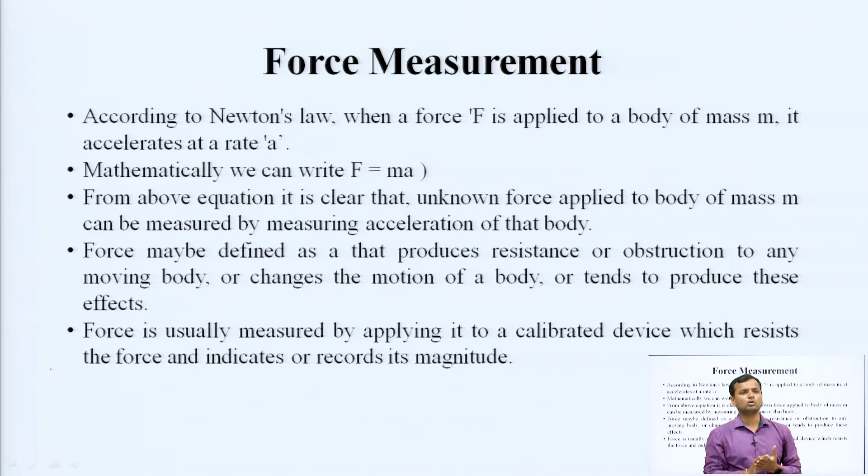So there are basic various devices to measure force, or the pressure, because pressure is also proportional to force. There are various arrangements and various techniques that can be used to measure force.

First is force measurement using accelerometer, second is force measurement using vibrating wire sensor, third is force measurement using the load cell. In that we have two categories: first is cantilever beam type load cell, and the second is column type load cell.

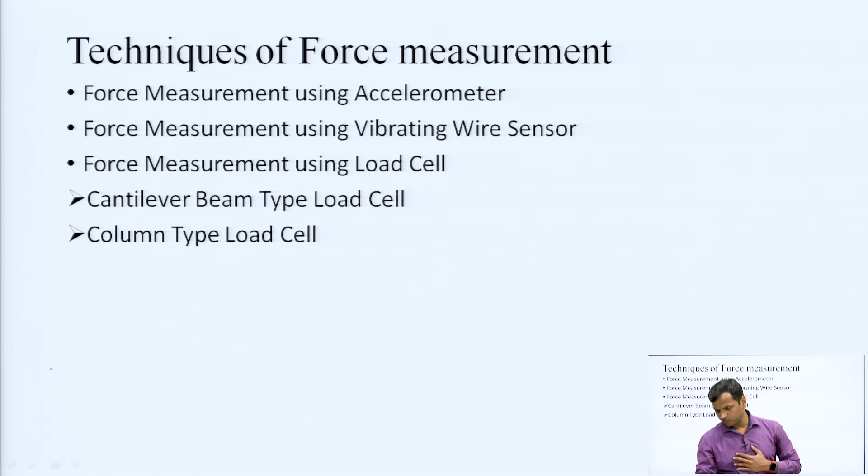So first is force measurement using accelerometer. This is the basic arrangement of force measurement using accelerometer. By using an accelerometer of any type, the acceleration of a body of known mass due to applied force can be measured, as we have seen in the formula F is equal to ma. It will be proportional to the mass of the body and the acceleration. So by knowing the amount of acceleration in the body of mass m, we can know the force.

By using accelerometer of any type, the acceleration of a body of known mass due to applied force can be measured. Then using Newton's law, from mass and acceleration, the applied unknown force can be calculated. But practically when we use the accelerometer for force measurement, it is limited because forces are not free, but they are part of the system, so it is very difficult to decouple these forces.

Also, this technique is useful in measuring some transient forces, because acceleration provides motion in the body, so it will also give the transient forces of motion, since force is proportional to mass and acceleration as well. The application of this technique is in calibration of forces produced by thrust motors or in space vehicles. This is the basic application when using the accelerometer method of force measurement.

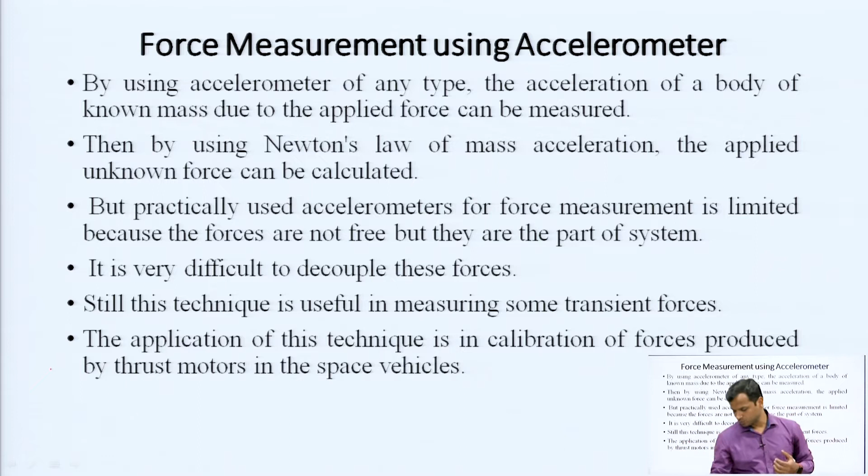Now the second technique. The previous technique was very basic and simple, because in the formula of force, F is equal to ma, it is proportional to mass as well as acceleration, so by providing acceleration in any body of mass m, we can know the force. The second method of force measurement is using the vibrating wire sensor.

A wire is kept vibrating at its resonant frequency using a variable frequency oscillator. In that arrangement, one variable frequency oscillator can be used. The resonant frequency given by the variable frequency oscillator is f equals 0.5 by L, under root of T by m. Here f gives the resonant frequency, L is the total length of wire used, m is the mass per unit length of the wire, and T is the tension due to the applied force.

So, the formula for resonant frequency can be given as 0.5 by L under root T by m. That will be the basic formula used for force measurement by a vibrating wire sensor. This is the basic arrangement for force measurement using the vibrating wire sensor.

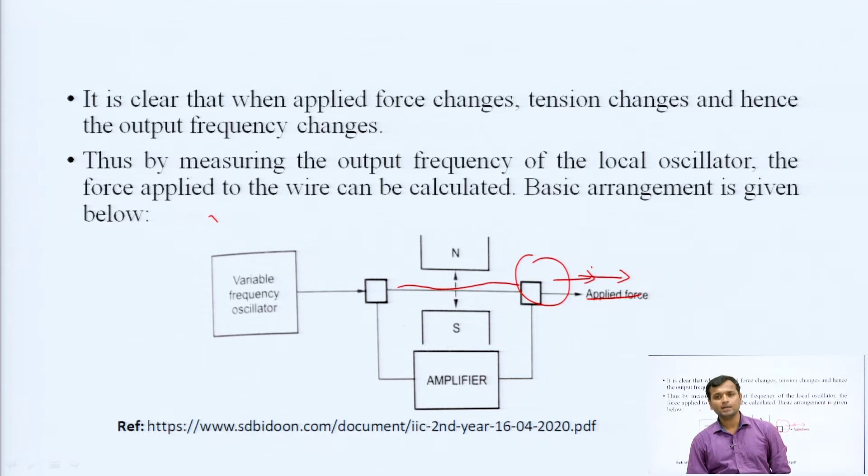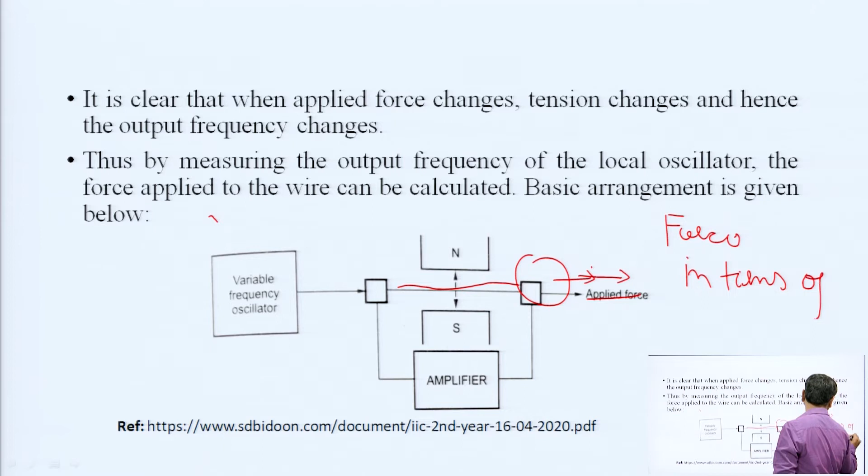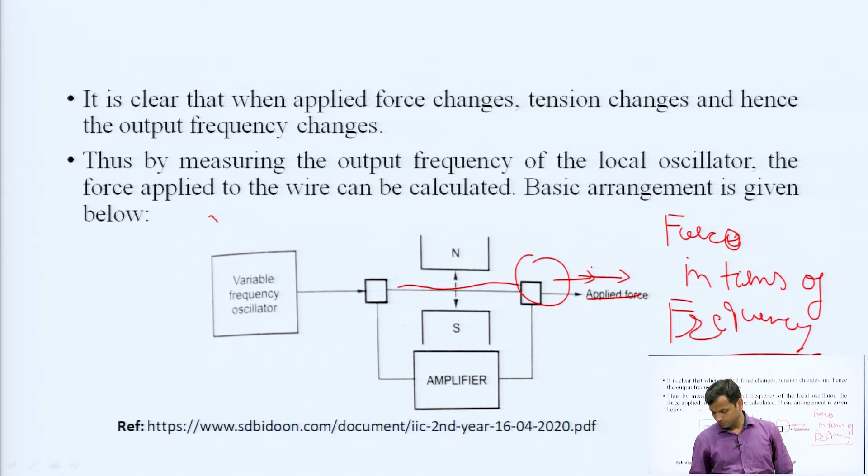So, by measuring the frequency, a force can be calculated. Here we have calculated the force in terms of frequency. So, there is a basic arrangement when we use any type of transducer or sensor: we get a physical variable in terms of various energy forms. Here we are getting the force in terms of frequency.

The next arrangement is force measurement using the load cell. The load cell is an electromechanical sensor used to measure static force as well as dynamic force. It is the most widely used transducer in many industrial applications, which can handle a wide range of forces.

The material used for the load cell should possess a linear stress strain relationship. That means when we provide force on any wire or object, on one side we have stress and on the other side we have strain. That stress strain curve should be proportional to each other. This is the basic characteristic of instrumentation also, that a good instrument should produce good linearity. When we provide stress on any object, it will also provide the equivalent strain, giving a linear relationship between stress and strain.

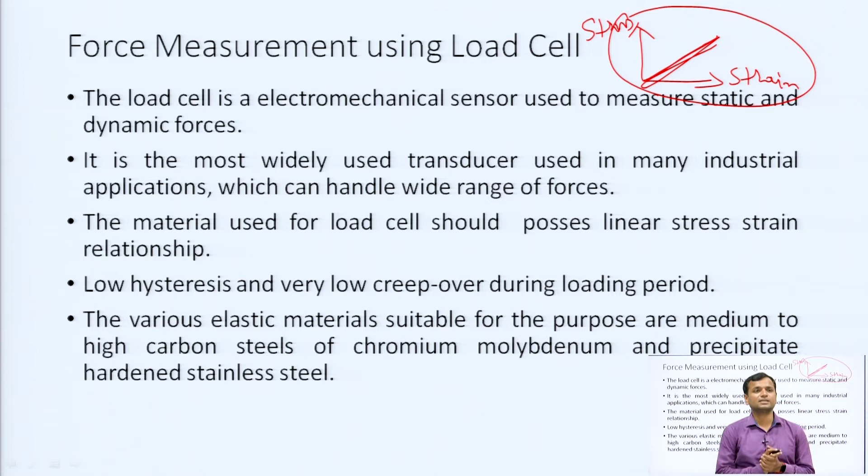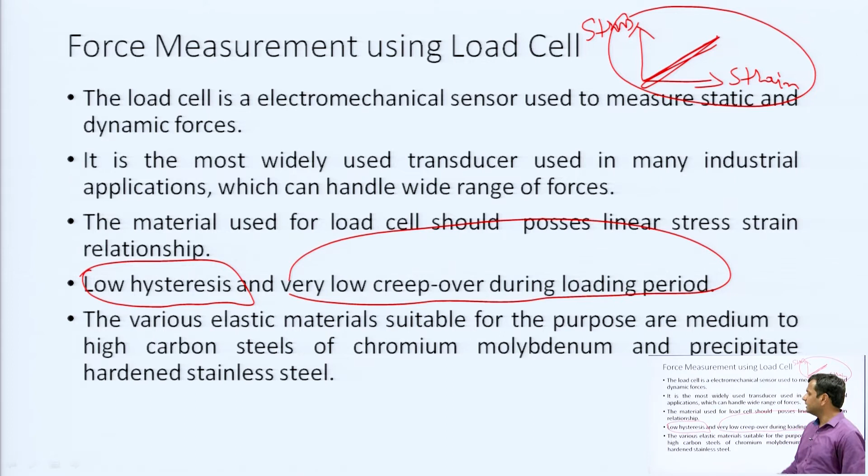Also, it should have low hysteresis and very low creep over during the loading period, so the loading effect should be minimized. As we have seen, when we increase the input, the output follows the input linearly, but when we decrease the input, the output does not follow the same curve. That term is known as hysteresis.

So, when using the load cell, it should provide low hysteresis and very low creep over during the loading period. Also, various elastic materials suitable for this purpose are medium to high carbon steel, chromium, molybdenum, and precipitate hardened stainless steel. So in terms of material, when using the load cell, we should take this caution.

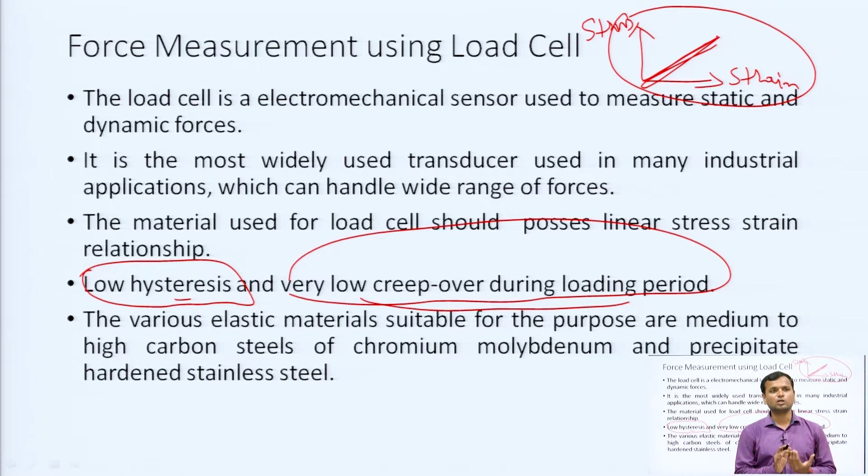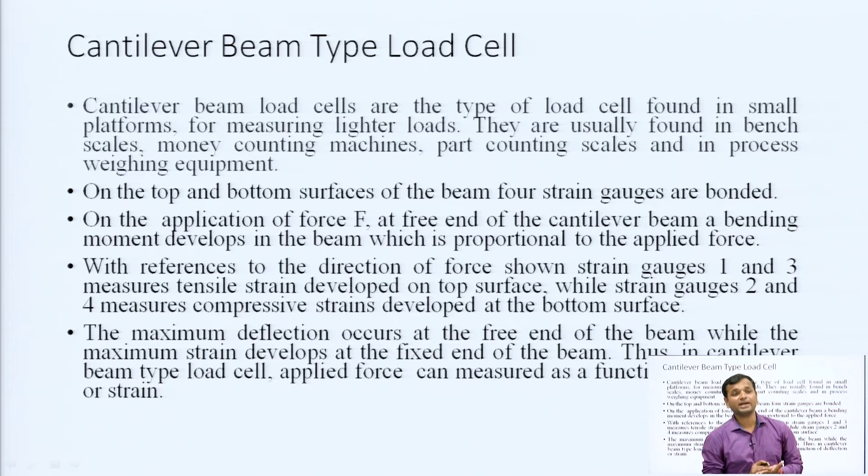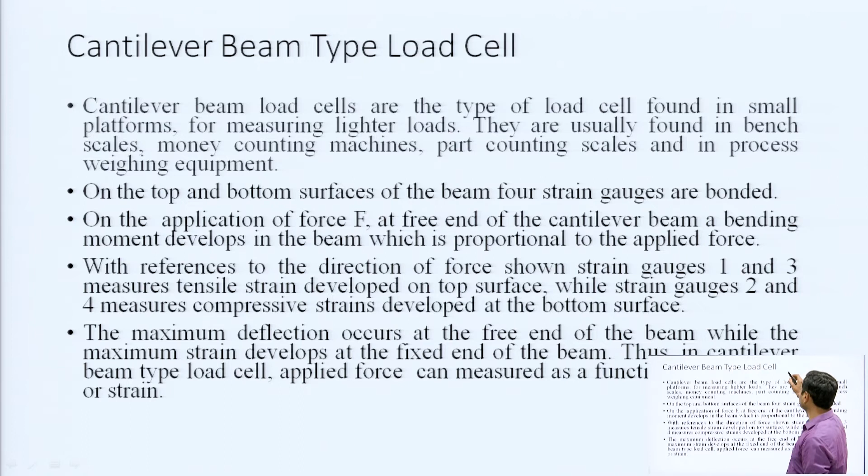The first arrangement is the cantilever beam type load cell. These types of load cells are found in small platforms for measuring lighter loads. They are usually found in bench scales, money counting machines, part counting scales, and in process weighing equipment. On the top and bottom surfaces of the beam, 4 strain gauges are bonded. So the basic mechanism used in the cantilever beam type load cell is the strain gauge.

The basic work of a strain gauge is that it can be used to measure strain. In the cantilever beam type load cell, we use 4 strain gauges. On application of force F at the free end of the cantilever beam, a bending moment develops which is proportional to the applied force. With reference to the direction of force shown, strain gauges 1 and 3 measure the tensile strain developed on the top surface.

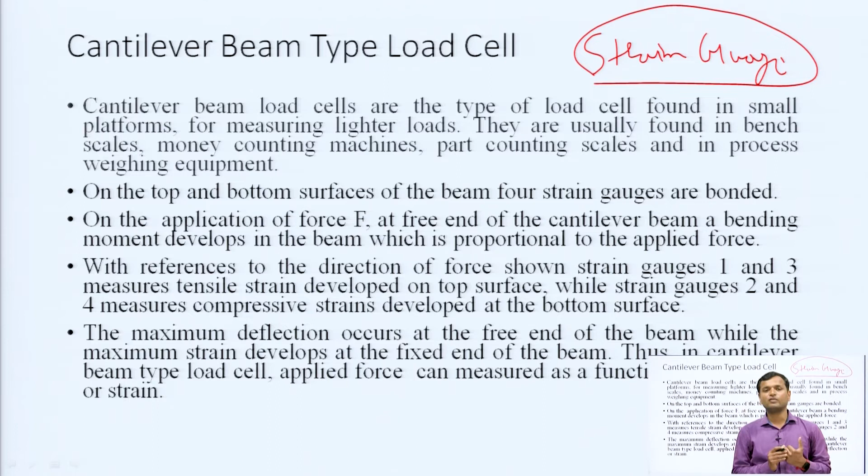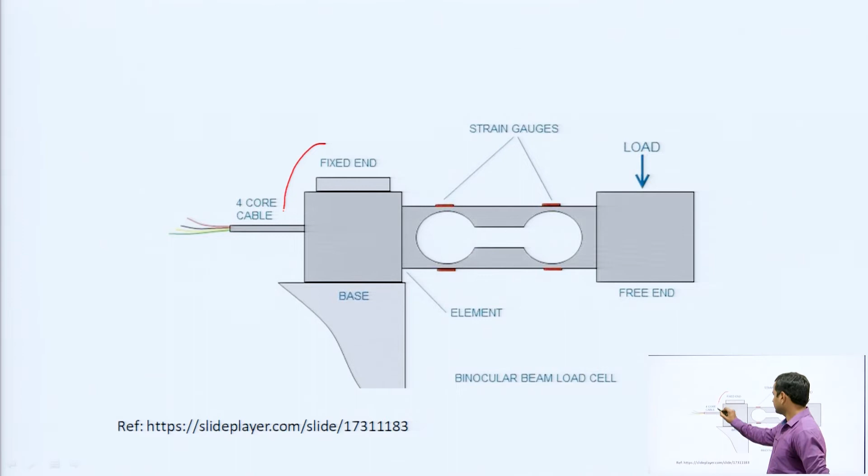Strain gauges 2 and 4 measure the compressive strain developed at the bottom surface. The maximum deflection occurs at the free end of the beam, while the maximum strain develops at the fixed end. Thus, in cantilever beam type load cell, applied force can be measured as a function of deflection or strain. In this basic arrangement, one part is fixed and one part is movable.

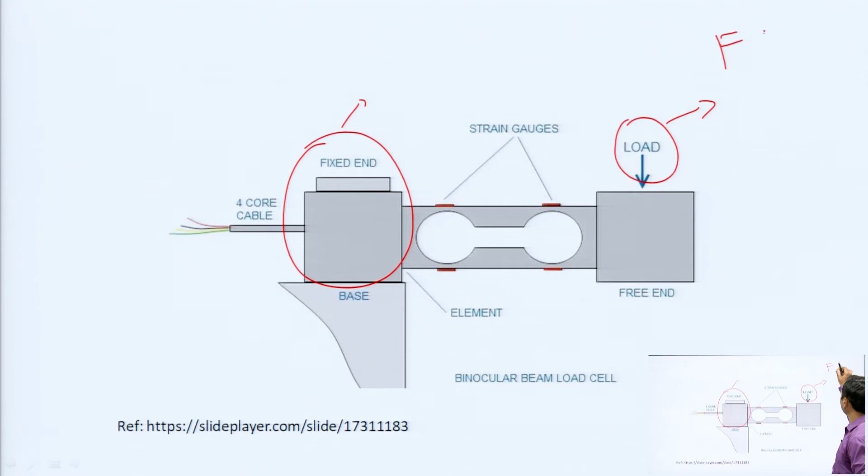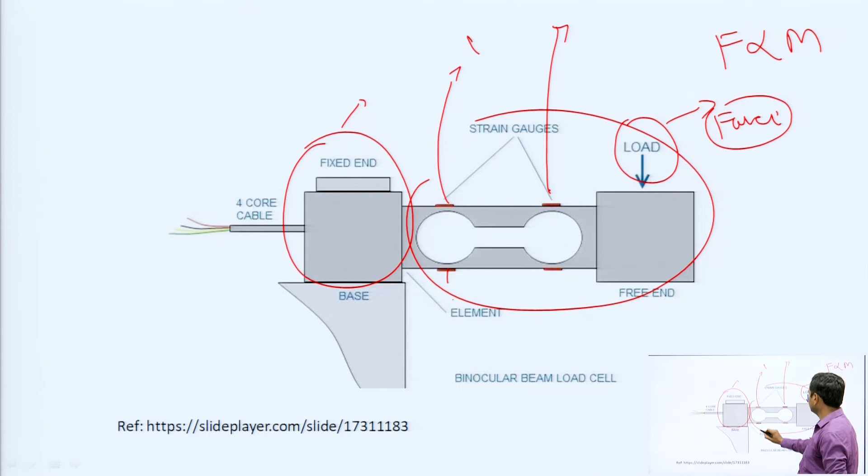When the load is applied, that load F is proportional to mass, so any type of mass or load applied will be equivalent to force. On the free end, when we apply the load, this beam or column will move. We have used 4 strain gauges, the red ones, labeled strain gauges 1, 2, 3 and 4.

Strain gauges 1 and 3 are used to calculate the tensile strain caused by this load, and strain gauges 2 and 4 are used to give the compressive strain on the load. Because of this load, a proportional output can be generated and calculated using these strain gauges. One end of this is fixed and one end is movable.

That is the free end, and this is the fixed end. When we provide the load on this, that load is equivalent to force, because force is directly proportional to mass.

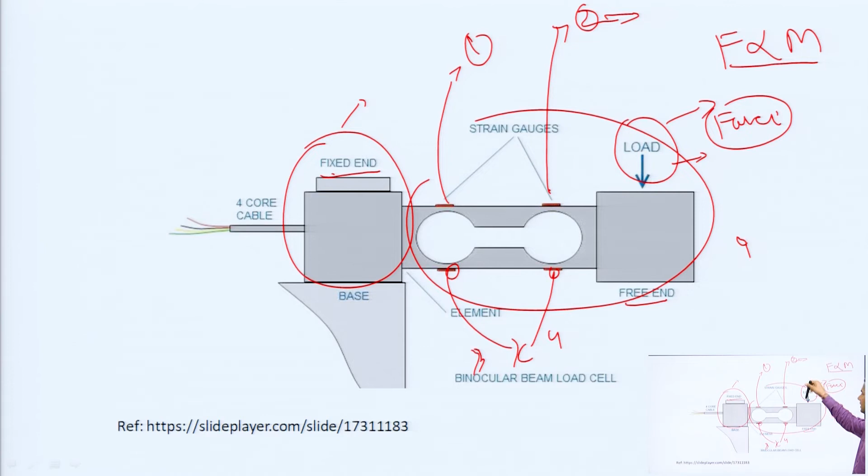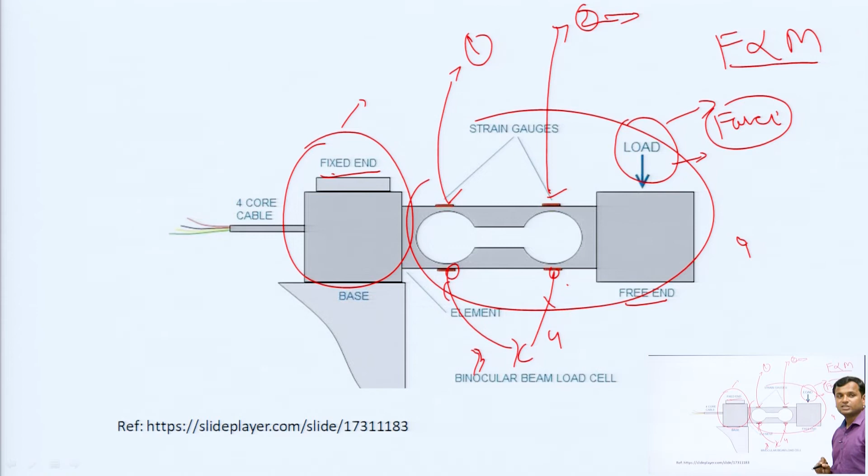So, when we provide the force, strain gauges 1 and 2 will be used to give the tensile strain, and strain gauges 3 and 4 will give the compressive strain. That is the basic principle of working of the cantilever beam type load cell.

The next arrangement is the column type load cell. The simplest method for measuring unidirectional forces is to use the column or rod type load cell, which can be used in case of tension or compression. It also uses the strain gauge as a basic element to measure the force.

By using electrical strain gauges attached to the body, the stress developed due to the force on loading can be measured. The basic principle of the column type load cell and the beam type load cell is the same: we use strain gauges, and when force is applied, we get an equivalent electrical output. The column type load cell structure is shown in the next figure.

We see that when the steel cylinder is subjected to a force, it tends to change in dimension. If strain gauges are bonded on this cylinder, the strain gauges also stretch or compress, causing a change in their length and diameter. This change in dimension of the strain gauges causes its resistance to change. This change in resistance, or output voltage of the strain gauges, becomes a measure of the applied force.

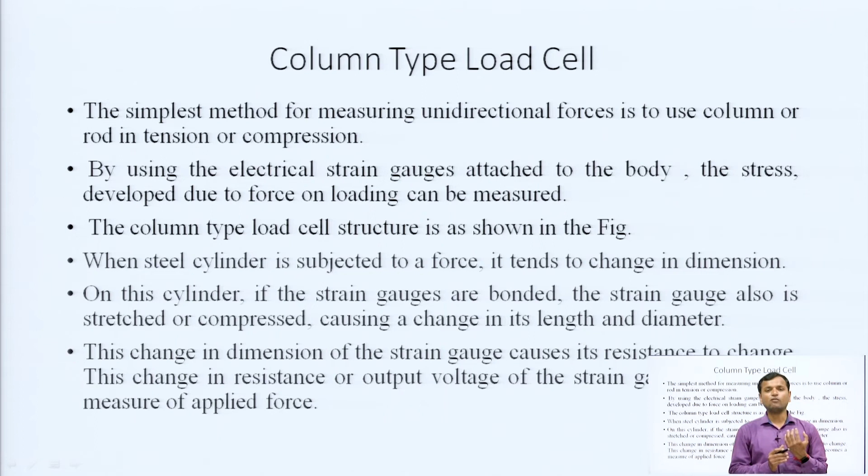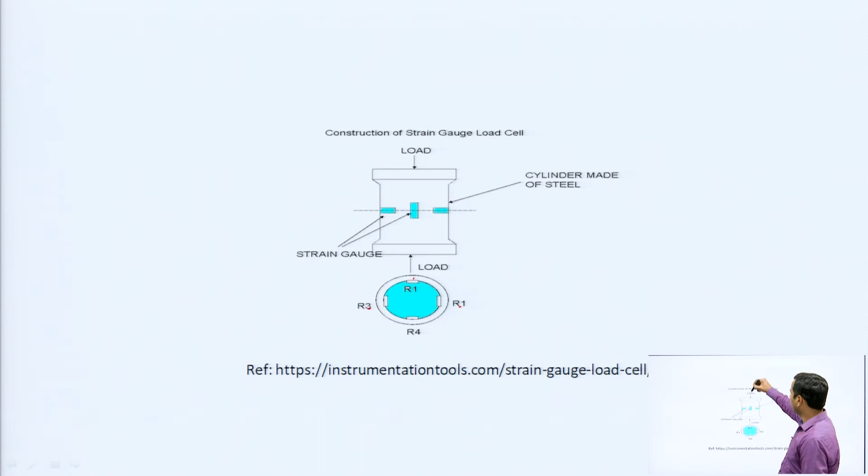We will see the basic arrangement of that. Here, 4 strain gauges are used: R1, R2, R3 and R4. When we provide the load, because the structure is of column type, that load is equivalent to force. When we provide the load, the shape or dimension of this cylinder changes under compression.

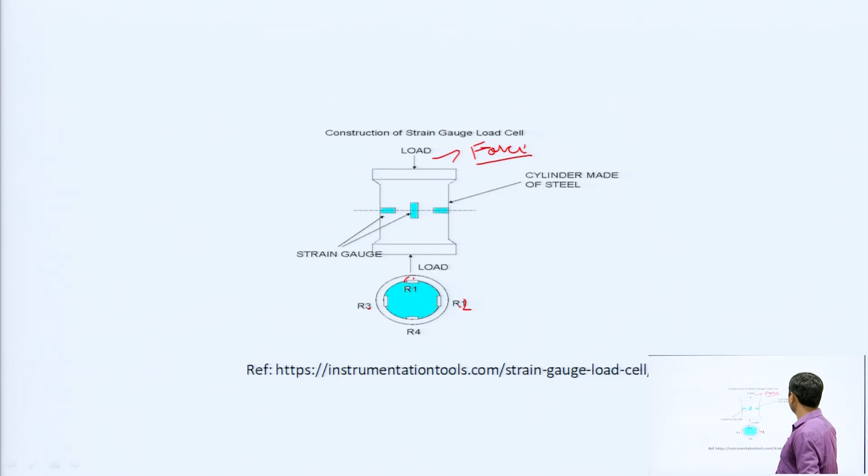We have used 4 strain gauges: R1, R2, R3 and R4. This arrangement is here only. When we provide the load on that, the basic work of the strain gauge applies.

When we provide the force, resistance changes, and this change in resistance with respect to force can be measured with the help of the strain gauge. Here we have used 4 strain gauges: R1, R2, R3 and R4. Two strain gauges are used for the tensile strain.

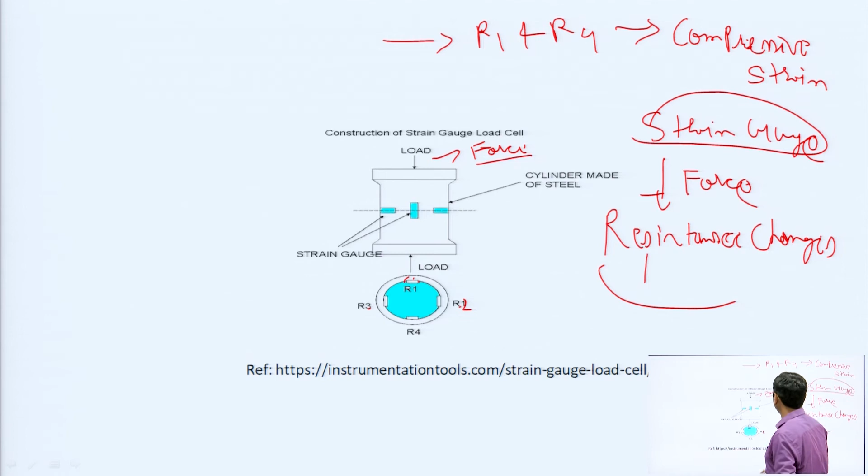Here we can see that R1 and R4 are used for compressive strain, and R2 and R3 are used for tensile strain. So when we provide the force, the resistance of R1 and R4 will give the change in compressive strain, and the resistance of R2 and R3 will give the change in tensile strain. So that will provide the equivalent output in electric form proportional to the force. That is the basic arrangement of the column type load cell, in which force can be measured with the help of the arrangement of various strain gauges.

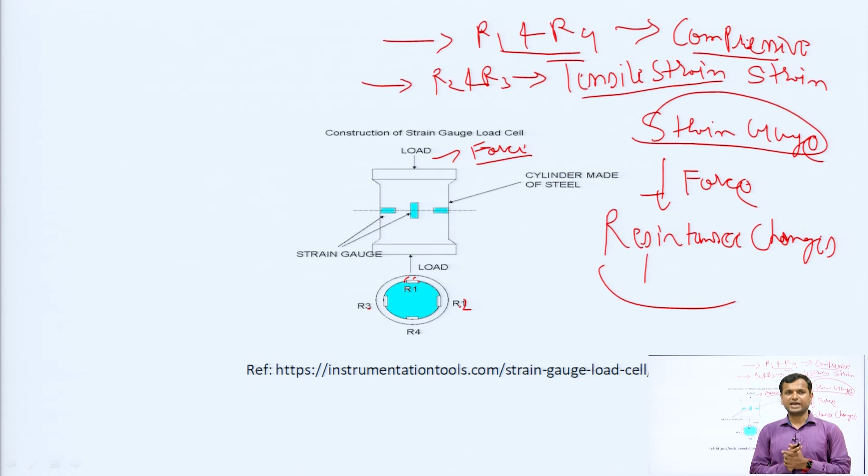Now there are various advantages of load cells. We have used the column type load cell and beam type load cell, because the load cells are temperature compensated. There are various advantages of load cell. Also, they have a stable system with no moving parts and linkage, because we are not using any type of moving parts in the strain gauges.

As we have seen earlier, in displacement measurement we used mechanical devices to measure the displacement. When we use mechanical arrangements to measure displacement, we have some friction losses because of the moving parts we are using. But in the case of a load cell, when we measure force with the help of a load cell, we are not having any type of moving part. So that will be one advantage of the load cell.

A few of them have multiple strain gauges incorporated to reduce position effect. In the strain gauges we have used, since there are no moving parts, and also in the beam type load cell or column type load cell, we have used arrangements of multiple strain gauges. We have seen that in beam type load cell we also used 4 strain gauges, and in column type load cell also we used multiple strain gauges. So that will increase the accuracy and the resolution of the devices.

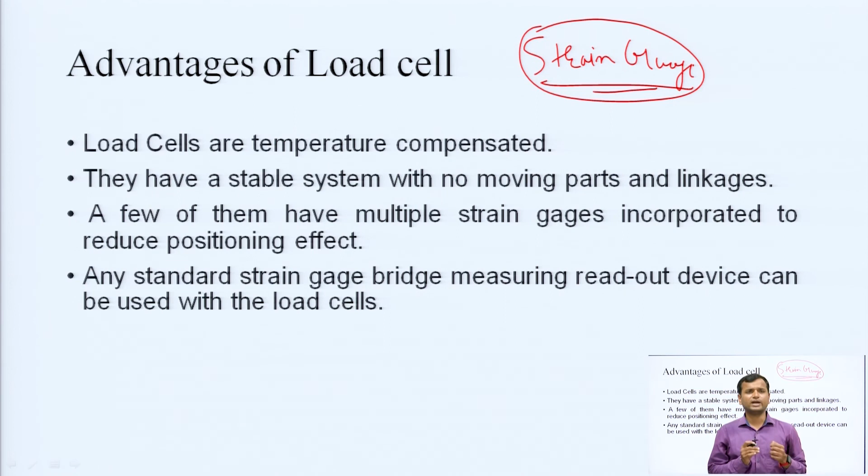The basic principle of strain gauge I have already told you - when we provide any type of force or strain in the wire, the resistance of that wire changes. The resistance is equivalent to rho L by A. So when we provide any type of force, then the resistance changes - the length in the wire, if this is the wire, and if I am providing any type of force in it, then the resistance can be changed.

That resistance changes because of the change in area and change in length by providing the equivalent force. So that is the basic principle of strain gauges, and that resistance change can be measured, and it will be proportional to the force applied, which changes the area and length of the wire. So rho is the resistivity, L is the length of the wire, A is the area.

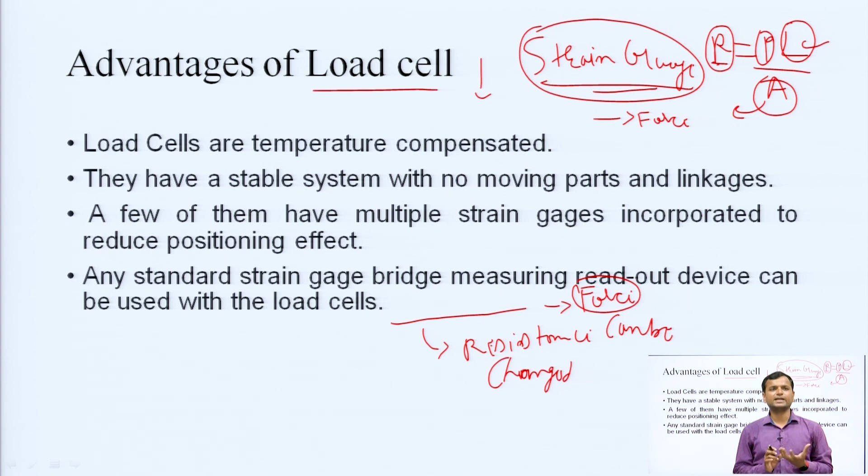So that is the basic principle of strain gauge, because in the load cell we have used it in both categories - beam type load cell and column type load cell. In both areas we have used the arrangement of strain gauges, and these multiple strain gauges provide you the tensile as well as compressive strain caused because of the force or the load. So those are the various advantages of the load cell, and there are various applications of load cell in the industry. Also, a few of them use multiple strain gauges incorporated to reduce positioning effect.